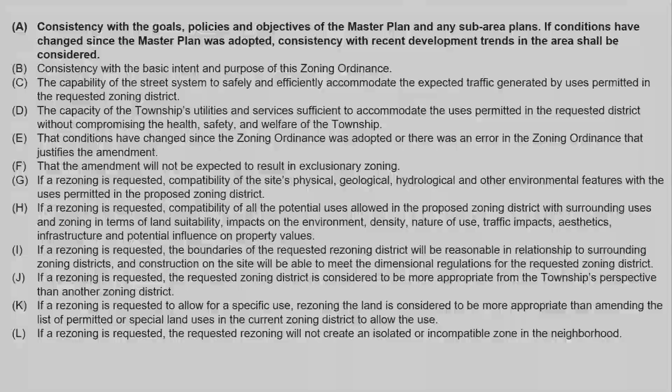The township's master plan was comprehensively updated in 2020, and there was a sub-area plan update for the Sumter Road corridor in 2022. Consistently, the area that is the subject of this rezoning request has been identified as a site for rural settlement future land use, which is correlated to the ag zoning being requested under this petition. So this criterion has been met broadly, that there is consistency with the master plan.

As a reminder, all master plans have a zoning plan as required by the Michigan Planning Enabling Act, which correlate planned land use to zoning. Having consistency with the master plan is one of the most critical criteria for considering a rezoning request.

The second criterion is that the proposed rezoning is consistent with the basic intent and purpose of the zoning ordinance. Section 1.102 of the Van Buren Township zoning ordinance includes regulations and restrictions governing the location and construction of structures and buildings to be used for business, industry, residence, social purposes, and other specified purposes. Based on that intent, the zoning ordinance includes provisions for zoning districts, setbacks, building height, and land use.

The specific set of regulations that would apply to this property if it is zoned agricultural and estates is section 3.109 of the zoning ordinance, which includes a mix of land uses made compatible with their surroundings by adhering to specific building architectures, setbacks, and design features.

In your packet, there's a printout of section 3.109 of the zoning ordinance that contains all the permitted uses and special land uses that are permitted subject to special land use approval in the ag district, for your reference. There's also a listing of the setbacks that would apply to those uses.

To speak briefly to the uses, the narrative letter has an array again of farming, both for personal and commercial farming uses. To be clear, there will have to be some understandings with limits on some of those farming activities. Things like milling lumber would be more of an industrial or manufacturing use that would not be permitted at the site, so we'll have to draw those distinctions and be clear about them.

But there are a lot of different arboriculture or lumber uses that are permitted under commercial agriculture that could be the result of this rezoning. And I will say that many agricultural practices are subject to state of Michigan policies and laws around best practices for agricultural management.

The capability of the street system and the capacity of the township's utilities and services are also considered in any rezoning petition. So I'll lump those together, though they are two different criteria.

The capability of the street system to safely and efficiently accommodate the expected traffic generated by the uses permitted in the zoning district, and the capacity of the township's utilities and services being sufficient to accommodate the uses in the zoning district, without compromising the health, safety, and welfare of the township.

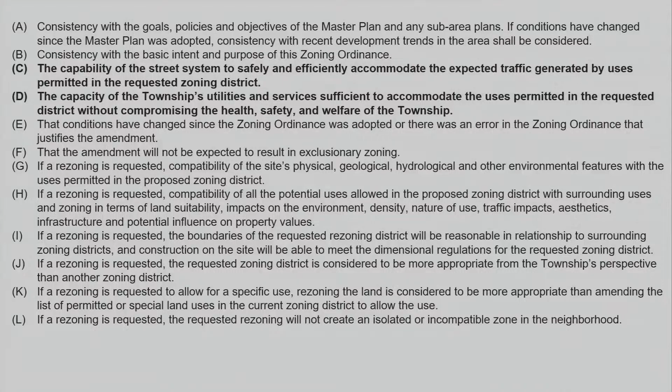On the street system, the proposed rezoning is situated on a site that's on Haggerty Road, and is not anticipated to add significant traffic generation to that stretch of Haggerty Road. As far as public water and sewer, the site does have public water, and is also large enough to contain a septic sanitary waste disposal system. I mention that because the township's sanitary utility district boundary stops north of that site.

The next criterion is whether conditions have changed since the zoning ordinance was adopted, or there was an error in the zoning ordinance that justifies the amendment.

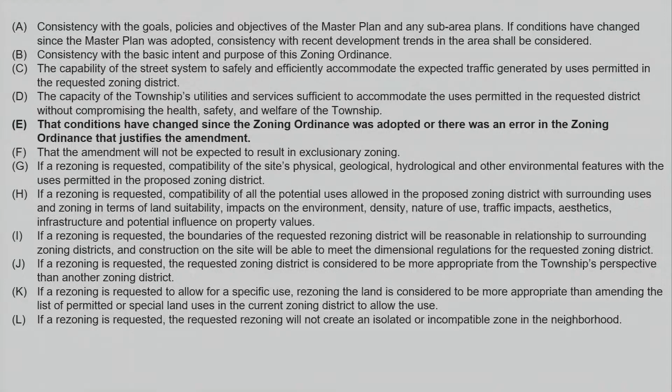The requested rezoning does not change the zoning ordinance, but rather brings the township further into compliance with the adopted master plan. There was no zoning error in the zoning ordinance, but conditions have not necessarily changed to the extent that an error needs to be corrected.

The next criterion we look at is whether the amendment will result in exclusionary zoning, which is a prohibition of a land use when there's a demonstrated need for the use. This request will not do that.

Whether the request is compatible with the site's physical, geological, hydrological, or other environmental features with the uses permitted in the proposed zoning district. I will point out this is a relatively large acreage lot where rural settlement or a lower density development pattern is suitable when you consider that there are some environmental constraints in the area or environmental features. There's a metro park to the east, the Griggs Drain, and some woodlands near the site.

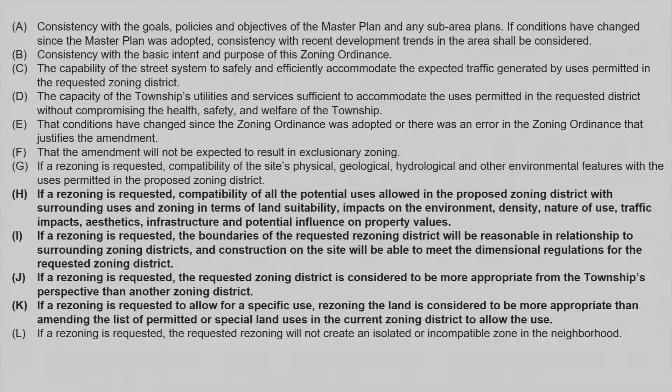I'll speak to the remaining criteria together: whether, if the rezoning is requested, the compatibility of all the potential uses allowed in the zoning district with the surrounding areas, surrounding uses and zoning in terms of land suitability, impacts on the environment, density, nature of use, traffic impacts, aesthetics, infrastructure, and potential influence on property values. Again, the owner intends to continue and expand upon the personal and commercial agricultural uses on the property and its use as a single-family residence.

These uses are consistent with the permitted uses of nearby properties, which are also zoned ag on the west side of Haggerty Road, and with the master plan calling for that type of zoning in the future.

If the rezoning is requested, the boundaries of the requested rezoning shall be reasonable in relationship to the surrounding zoning districts, and construction on the site will be able to meet the dimensional regulations for the requested zoning district. This is a site with over 500 feet of frontage, and it's 10 acres in area, so it will be adequate to construct buildings on the site that meet the required setbacks and adhere to generally accepted agricultural management practices.

If a rezoning is requested, the rezoning district being considered must be more appropriate from the township's perspective than another zoning district. Based on consistency with the master plan and the relative downzoning, this is found to be the case.

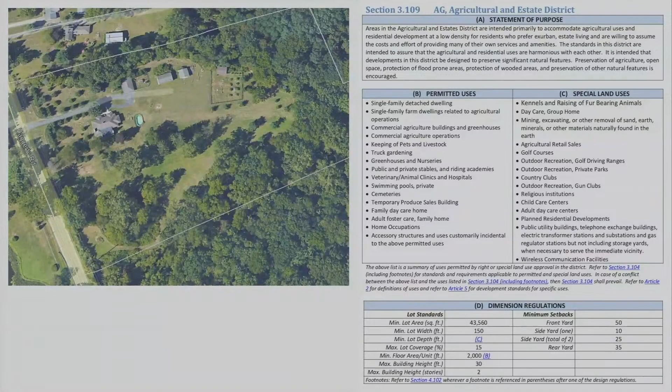If a rezoning is requested to allow for a specific use, rezoning the land is considered to be more appropriate than amending the list of permitted or special land uses in the current zoning district to allow the use. Given some of the use descriptions from the applicant, this is found to be the case. It would not be appropriate to bring commercial agricultural buildings, nurseries, greenhouses, things of that nature into the R1B zoning district. So that criterion has been met.

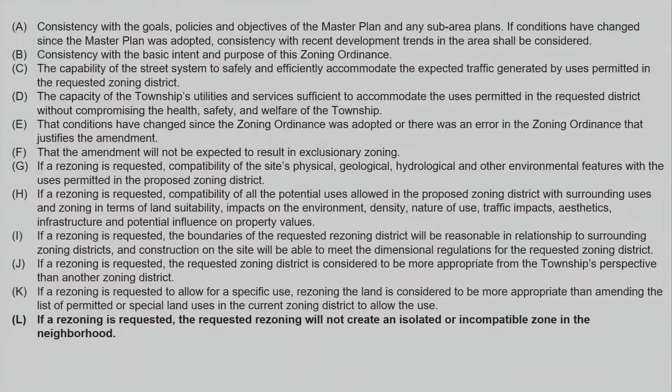Finally, if the rezoning is requested, the requested rezoning will not create an isolated or incompatible zone in the neighborhood. Again, there are agriculturally zoned sites across Haggerty Road to the west, and there is some analysis in this packet showing it is not going to be isolated in terms of the stretch of Haggerty Road on the east side.

As part of the analysis for this report, we wanted to take a look at what the feasibility would be of some of the other properties in this stretch being rezoned to ag. Some of the parcels along this stretch of Haggerty Road within, I don't know if it was 500 or 1,000 feet of this site, but a small distance from this site, there's a list of those properties that are nearby.

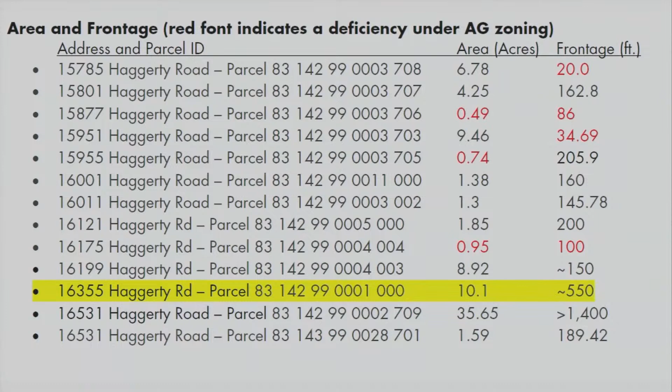A few of them have some dimensional issues that would restrict the ability to rezone to ag and use the properties for ag, but most of these properties would be able to be rezoned, and that lends to the idea that there would not necessarily be an isolated or incompatible zone, and this could be a rezoning that could occur elsewhere in this stretch.

Based on the findings I've just mentioned, findings 12.504A through L of the Van Buren Township zoning ordinance rezoning criteria, I would recommend that the Planning Commission recommend approval of the rezoning to the Board of Trustees. There are likely to be questions for the applicant or for myself, and I invite those questions. We have the applicant, Cameron Smythe, here in the audience, and he has not yet had a chance to speak about his request, so he's here if you'd like to invite him up to speak to it.

Okay, thank you, Director Power. And for the applicant, do you have anything to present to us? He's got to come up. Please identify yourself and your address.

My name is Cameron Smythe. My address is 16355 Haggerty Road. I would like to open up the floor to any questions. Dan, I think you did a great job of going through the case, thank you very much for that.

Okay, commissioners, do we have any questions for the applicant? Through the chair, I would like to know what are your future plans? I read your letter, but specifically, what are your future plans? And then I'd like to know more about your desires for lumber, growing trees.

Mr. Chair, I'd also ask, does the applicant realize that on an agriculturally zoned parcel, agricultural retail sales is a special use? You have to get permission to do that. Do you understand that? We're not in any grocery stores or licensed venues now, it's a network of family and friends that we sell to. A nice side note is that we use only organic amendments and fertilizers, we don't use any synthetics. As you can see, we have runoff into Griggs Drain here, so since we don't use synthetics, I don't think there'd be any adverse effects or negative externalities onto the environment. We do plan on retailing, but that's more next steps in planning.

Mr. Chair, I have a question regarding Griggs Drain, possibly for our engineering consultant. Sorry, I know you don't like engineering surprises, but I have a question regarding conversion of a property into agricultural use. This does have runoff into Griggs Drain. Are there any special engineering or drainage requirements that have to be taken into consideration when a potentially commercial farming operation is brought up alongside a drain that's right next to the Huron River?

Surface water quality is controlled by EGLE, the state, they would look into that and make any determinations needed. As far as traditional stormwater management and runoff, if you were developing a new site, that's where you would have to go through the county regulations. Like we're normally seeing, I don't believe they're developing anything at this point, so from what I can see just looking at it right now, I don't believe there'd be any issues with that.

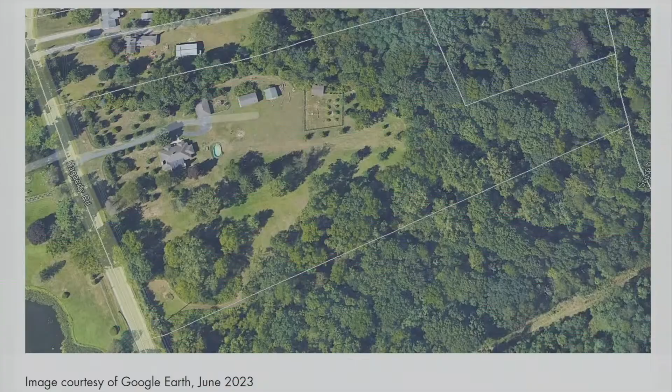So the first question — we decided to start the rezoning process because we're increasingly doing more agricultural activities on the property. We plan to start where there's that clearing, where we're going to put the apple orchard, and in the future we may open it up to the public for a you-pick apple orchard kind of situation. We're also expanding our vegetable garden to over 1 acre, and it's far too much produce for us to consume. These are passion projects we really enjoy doing on the property, and they are of agricultural background. So as we're moving in that direction, it made sense for our property to more accurately reflect the agricultural activities we are doing on it.

So now my follow-up question is, as our consultant from McKenna has stated, you cannot go back to residential. My concern is about the property value. Are you aware of what the property value is as residential versus changing it over to ag? I just want to know if you're aware of the difference. Sure, I haven't seen a side-by-side comparison, but we don't plan on selling anytime soon, so it's something I haven't really given much thought to.

Okay, I have another question please. This I guess is for staff or the consultant. Can you tell me, at the state of what he's doing right now, does the applicant really need to rezone? Or could he stay doing what he's doing, and then when he decides to expand, come before the planning commission?

Can we have the presentation by the township staff please? Director Power? Thank you, Mr. Chair. The Planning Commission is familiar with this case. They held a public hearing for the preliminary site plan review in November of '22, and then action was taken on the preliminary site plan and the special land use approval for the project in December. The Board of Trustees then approved the special land use in January of this year. So now the project has been going through engineering review and final site plan review by our consultants and staff for the past several months.

That is the purpose of tonight's discussion and potential action: to consider approval of the final site plan. I have a couple of comments to respond to items the Board of Trustees mentioned regarding their approvals of some engineering items. Otherwise, I'll defer to our planning consultant, Vidya Krishnan, to go over her findings, and then our township engineer.

As was just summarized, the proposal before you tonight is for final site plan approval for Brookwood, a senior housing development on a 44.23 acre site. It will have 132 independent living units in groupings of 2, 4, and 6 units, and also a clubhouse facility. The applicant received preliminary approval from the Planning Commission on December 14th, subject to a series of conditions. For final site plan approval, we basically review compliance to those conditions.

I'll summarize those in brief. The first condition was notation of a detailed phasing timeline and clarification regarding self-sufficiency of each phase. Originally the applicant had mentioned developing it in 4 phases, but when they appeared before you in December, they clarified the intention is to build it in 3 phases, with a detailed schedule for public and infrastructure improvements included. Based on that, each individual phase will stand alone and be self-sufficient, so should a future phase not materialize, the dwellings already constructed will still function as a self-sufficient development.

The plan notes that the roads and infrastructure will be built at one time, with a total construction timeline of 18 months, and 8 to 12 units being built per month to be leased as they come online. Given the provision of roads and infrastructure being built first, we believe this condition has been met. The second condition was Planning Commission approval of additional parking to satisfy visitor parking needs.

On paper, the applicant's parking calculations noted 114 extra parking spaces, but technically it's not 114 because they counted spaces within the garages and driveways. The actual number of extra spaces being constructed is 20, spread throughout the development so visitors can park and walk. The Planning Commission had recommended additional handicap accessible spaces among those 20-odd spaces so visitors have the ability to move in a wheelchair, and that has been done on the revised plan.

The third condition was addition of a deciduous or evergreen tree along Tyler Road in order to meet ordinance requirements, which has been done. The fourth condition was township engineer and Wayne County approvals.

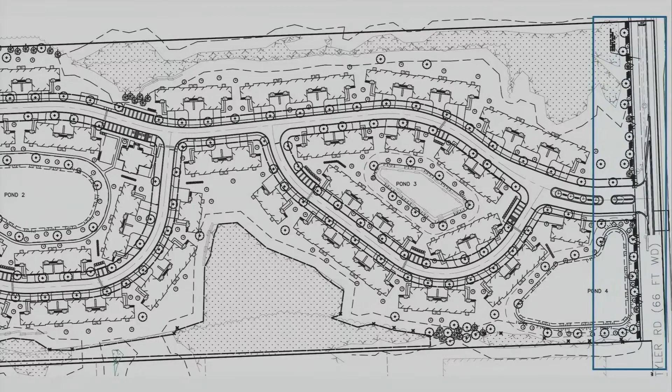I think that was the biggest reason for the applicant taking 6 months to come back before you. They have consistently been working with Wayne County to resolve grading issues and stormwater detention issues on the site. At the time this review letter was done, there was a letter from Wayne County still mentioning some unresolved issues, but noting these are issues that can be worked on. I believe additional documentation from Wayne County was turned in sometime this morning. I have not had a chance to review it, so I'll defer to the township's engineer and Director Power to clarify at what stage it is.

However, I do not believe the engineering issues that remain to be addressed will have any bearing on final site plan approval. Those conditions will have to be met before they start construction, so it's not a reason to not proceed with final site plan approval.

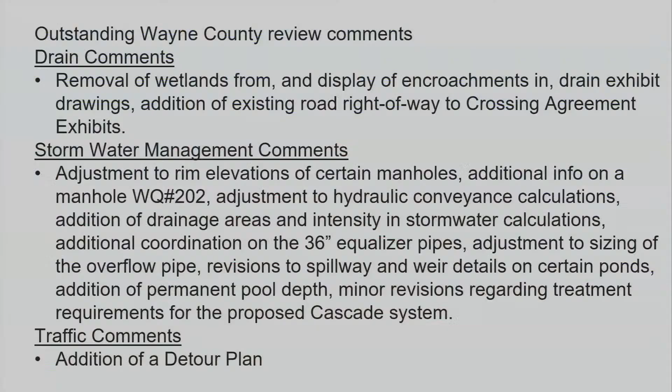Board of Trustees special land use approval was granted by the board on January 17th of 2023. There was a requirement that a dumpster enclosure be added for the clubhouse. At the time the project came before you, there was no dumpster enclosure, and the Planning Commission decided that for a clubhouse servicing all of these units, you do need an enclosure.

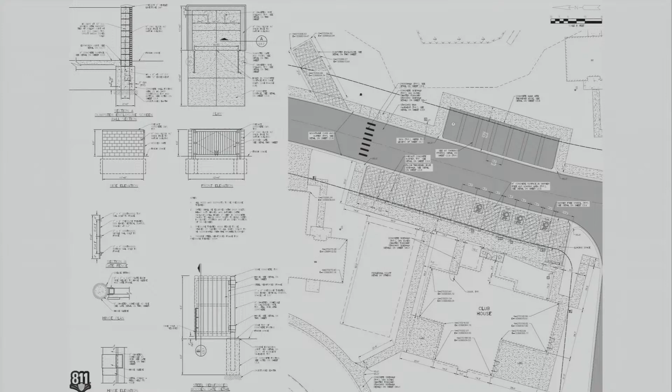So the revised plan does note a small access drive off the main access drive where the dumpster will be located so trash trucks can navigate in and out of the space. Typical enclosure details have been noted, and they will be block with face brick to match the clubhouse building and will have steel reinforced wooden gates.

And finally, there was some discussion about the maneuverability between the units when you have garages facing each other, courtyard type of entries.

So the applicant has provided, Director Power has pulled it up over there, has shown the turn diagram. The applicant has shown an F-150 pickup truck actually trying to make the move in and out of the driveway. As is typical in this, they will have to reverse back onto the driveway. The garages are not big enough to accommodate a pickup truck.

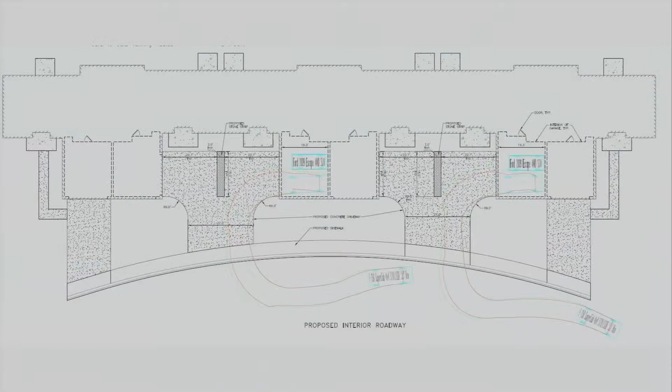So anyone in this development who actually has a pickup truck, which is one of the longer vehicles, will be parking in the driveway. However, the garage is more than sufficient to accommodate any of the regular passenger vehicles or sedans. At this time, all of the conditions of preliminary approval have been addressed, with the exception of engineering approval, which the township engineer will address.

So it is our recommendation that the Planning Commission grant final site plan approval for Brookwood Senior Housing Development to be located on Tyler Road, subject to full engineering approval from Wayne County and the township engineer. This recommendation is made with the understanding that should for any reason, at the time they're getting final engineering approval from Wayne County, any aspect of the site layout change significantly, such as the units moving around, the access drives, or any of the improvements moving around, the applicant will have to come back before you for amended approval. I'm happy to answer any questions.

The plan should indicate the finished grade of all fire hydrants, valve, well rims, and all other water structures. Profile views are currently not indicating finished grade for hydrants. Fire hydrants are also not labeled on sheet C 5.14 and on C 5.15. All hydrants shall be labeled on the water main sheets.

Per discussions between the applicant and the township, a water main extension to the east property line was added between units 30 and 31. The original intent of the township engineer's request was to place the water main extension just north of Basin 5, between Basin 5 and the wetlands. Also, per township standards, the applicant must add a gate valve and well at the termination of the water main stub at the property line. It should also have a profile for the design, and an easement is required.

We're currently working through this with the applicant. We requested this during one of the last engineering reviews, so that is still being coordinated between the township and the applicant.

The applicant should verify the need for a tapping sleeve. Currently, all the water main tee labels on the plans call out a 12 by 8-inch tapping sleeve. Lastly, for water main, per Chapter 3, Part 4, Section D of the Township Engineering Standards Manual, water services shall not be installed under driveways or other obstacles. Currently, the water shutoff for Unit 119 is under the driveway.

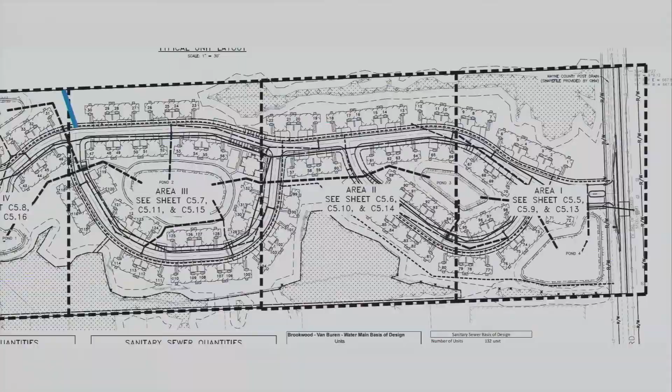Sanitary sewer: the township's GIS records indicate a 15-inch public reinforced concrete pipe sanitary sewer main running east-west along the south side of Tyler Road, with two sanitary manholes, one at the east property line and one at the west property line. The sanitary main flows west towards Morton Taylor Road. Township GIS records also indicate a 10-inch sanitary stub at the very northeast corner of the site.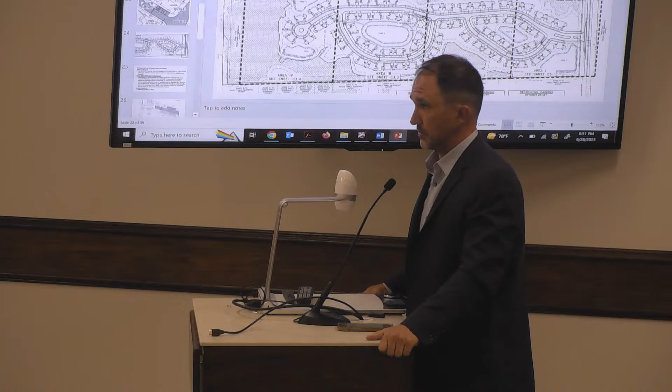Thank you, Mr. Chairman and members of the Planning Commission and Mr. Power. My name is Luke Bonner, Bonner Advisory Group, 1054 South Main, Ann Arbor, Michigan. We're consultants to the project. I want to introduce the team - the entire team is here this evening, starting with Golan Sapir, here from Israel, the primary owner investor in the project. We have Melody Stevens, Ido Furman, who did a nine-hour drive from New York to be here this evening, Chris Garner, owner, our consulting engineers from Wade Trim, Eric Smith and Veronica Clark, and our other real estate consultant, Tom Gritter from Gritter Real Estate Services, and Gordon Dion.

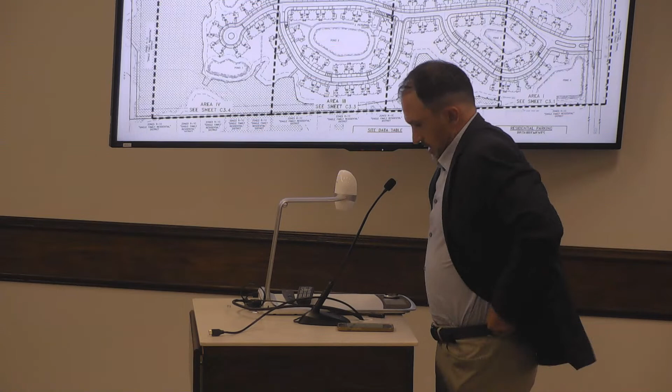We do appreciate all of the support for this project going through the process over the last 24 months. The staff has been excellent to work with and very consultative and helpful. The point we're at this evening is a request for final site plan approval contingent upon the engineering conditions being met. Over the last several months, engagement with Wayne County, OHM as their engineering consultant, and the township's engineering consultant has been pretty regular and continuous. We feel the outstanding engineering items are more detailed and administrative, and there weren't any engineering issues that were going to massively change or alter the site plan at all. Hence the reason for us being here this evening. All of those issues have been addressed in a response letter from Wade Trim to the county and to Fishbeck, so we feel comfortable managing those final details on the engineering drawings and getting those submitted for final site plan approval.

As it pertains to mosquito management that was brought up, we believe that's in general an overall property management issue that we plan to take on. Because if you walk the site on the north end where the conservation easement is, it's pretty heavy mosquito territory up there, so there's definitely going to be a plan for residents in general to manage that.

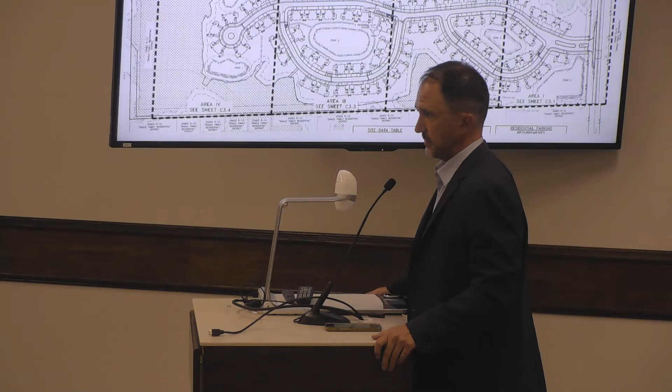When it comes to the ponds, we certainly plan to manage it more from an infestation-related standpoint versus potentially aeration, only because the ponds are shallow and they'll dry out quickly. I'm not sure if aeration is the best method versus consistently spraying, but we will discuss that with the township as well.

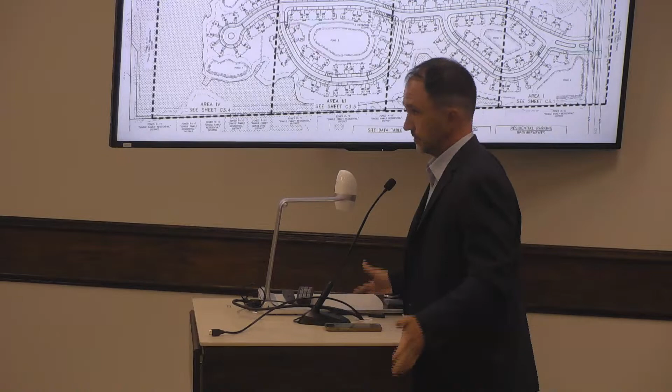And related to fencing, we do agree, if there's a safety issue on the fence on the pond along Tyler Road, we can meet that with a decorative 4-foot-high aluminum fence that has the wrought iron look to it. Again, we're appreciative to be here this evening, and we appreciate all the support. We have other members of our team here that could answer questions if you have them.

Commissioners, questions?

Mr. Chair, Commissioner Jarrett, question for Fishbeck Engineering. What kind of standards are there around mosquito abatement in a drainage pond like these, in these sort of ponds?

I'm not entirely sure, to be honest. Engineering standards don't typically deal with mosquito repellent. From the Township Engineering Standard Manual, the stormwater detention pond section just states 4-foot permanent pool water, 1 on 6 side slopes - no aeration or anything like that is mentioned in the engineering manual. So at this moment, that's as far as I can answer that question. I can certainly follow up on that and see if I can find anything else.

Director Power, the mosquito aeration that you suggested, did you have any standards for what should be done? The zoning ordinance is pretty broad, and that's my understanding as well. There's nothing that I've seen in our engineering standards that speak to the aeration. It's just a comment in our stormwater pond section of our zoning ordinance that asks for consideration of aerating - mechanical aeration, or selective plantings. I'm not entirely sure what that planting mix would be, but generally the more you're maintaining a wetland aesthetic and holding a permanent pool of water at a shallow depth, you're going to have mosquito concerns as opposed to moving water. So the planting selection may just be more of a uniform planting than a mix of wetland species, but I'm not sure - Ms. Krishnan, do you have some ideas?

Just an insight - at least historically, we used to require aerators in ponds until Wayne County said no. A few years ago, Wayne County decided they did not want to see aerators in their ponds. We do planning for a lot of Wayne County municipalities, and we've seen across the board that aerators are no longer permitted in the ponds. It's still there in our zoning ordinance, but the county may not allow it. So I think the best way to manage it is through selecting what kind of plants go in around the basin so they don't harbor mosquito breeding grounds, and also spraying them as part of the regular maintenance. If the Planning Commission should choose to consider aerators as an option, definitely add it only if the county permits it, because ultimately the pond is under Wayne County's approval, and to my knowledge, they don't allow aerators anymore.

Is there a reason to assume that these drainage ponds would have more mosquitoes than the wetland it's being converted from? No. Sorry, it just felt like I had to ask that.

Okay, yeah, several minor detail comments on the engineering letter. Okay, and it did sound like the applicant is aware of all of the items on the engineering list and is not contesting any of them at this time. I suppose, Mr. Chairman, that's a question for the applicant to answer. Yes, please, ask the applicant.

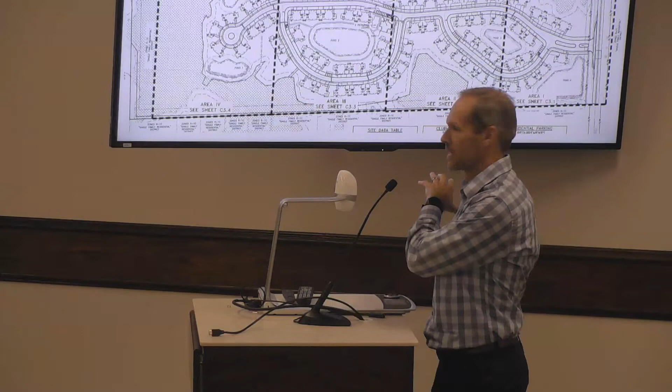I wanted to go back to the comment about plantings or aeration in the ponds. Our experience has been that aeration isn't something we've done in a while. We have landscape architects on staff, and I asked them about what plantings there could be, but there really isn't anything. The best way to handle mosquito control is a spraying plan, which is what the applicant's going to do.

In terms of the response letters, yes, I agree. A lot of those are detailed final construction document type comments that I agree we can pick up, and it doesn't change the design intent that you see here for final site plan approval.

You don't have any argumentative position against what our engineers are proposing, is that correct? That is correct, yes.

Just a correction - the last round of comments we received from you, we haven't responded back to those yet. We just responded to the county ones here in the last couple days. Our letter was sent out last Wednesday. So it's in process.

I have a question. You mentioned to control the mosquitoes you have a spraying plan - how might that spraying plan potentially affect the wetlands and wildlife in the area? We would stay in the developed area. What material would you plan on using, is it toxic in any way? No, there's something my landscape architect recommended that would be good, natural, but I don't have the specifics. So you'll make it clear that you can't use anything detrimental to the wetlands and local wildlife? Correct, we can put that in the maintenance plan.

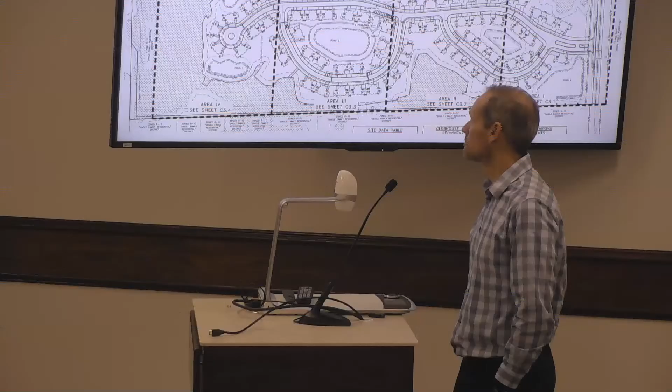I have another question, though I think this may be a Fishbeck question. You mentioned in your write-up that there are still concerns with the constructability and installation of the force main relative to the existing utilities in Tyler Road. Assuming that's related to getting the pump underneath the road - when you say that, are you saying during construction it may be difficult and there may be problems, or that at this point they haven't totally engineered that system to get over there and make it work?

A little of both. Constructability-wise, it appears to be very difficult. The GLWA 42-inch water mains there are, I believe, 13 or 14 feet deep. So when you open cut and start excavating Tyler Road to place a force main that has to be 1.5 feet lower than the 42-inch water mains, you're getting to depths of 17, 18 feet.

Right now - and I'm not saying it can't be done - but the plans had a detail for the open cut that just showed a typical trench detail with one-on-one slopes going up. I think OHM, the county, had a comment recently noting it would probably be difficult to maintain one lane of traffic doing that. They need to provide a detour plan, which they don't have yet. So there are several details I believe they need to work through still.

That's a very deep excavation and very sensitive water main, transmission mains. I think the report said they were AC pipe, but we just recently found out they're pre-stressed concrete pipe - large concrete with reinforcing steel that's been pre-tensioned. Those are fairly delicate, from what I've been hearing, and we want to make sure it's very detailed on how this gets constructed.

We also had a comment about going over those 42-inch water mains. There's just a 10-inch - I shouldn't say just a - there's a county drain there that appears to travel under the entrance drive in a 10-inch culvert. We want to make sure the applicant looks at whether that 10-inch culvert could be raised, or the water main lowered, et cetera. We want all those details very clearly designed on the plans.

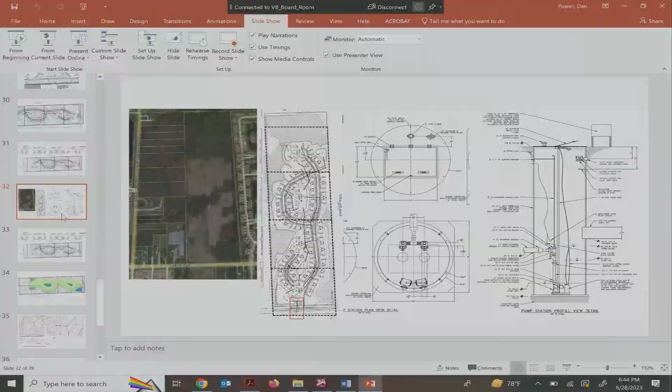MOT, detour plan, area of construction influence - all of those items should be detailed out. Because if you excavate a trench like that down to 18 feet deep, it needs to be so wide you're getting an 18 to 20 foot wide hole, and you need to support 3.5 foot large water mains while you're doing all that work. That's the concern - we want to make sure GLWA is aware, and I believe we've had that comment before too.

Okay, so you're confident they can achieve it, they just have to work through the details, is what it sounds like?

Yeah, it should be addressed and acknowledged on the plans. I believe OHM has commented on this, they initially approved the open cut, but they recently asked for MOT as well. So as long as the construction details on the plans are shown a little more clearly.

Through the chair, okay, I'll make a couple of comments. The design of the actual pump station apparatus, to my understanding, is unlikely to change. The method of having to divert the wastewater that way is probably the only feasible route from what we've reviewed. So a lot of the construction issues coming at this point are relative to how the pipes cross Tyler Road, to my understanding, and that's the detail that has to come forward. But that's not likely to change the location or the overall method of having to use a pump station at that site.

Is that fair? I forgot, you had mentioned the pump station system itself, we recommended approval of it. The pumps, so our concern mainly is on the 4-inch outlet that will cross Tyler. So even if that changes or it doesn't change, the pump system itself, that the Board of Trustees, or we recommended the board approve, that would not change.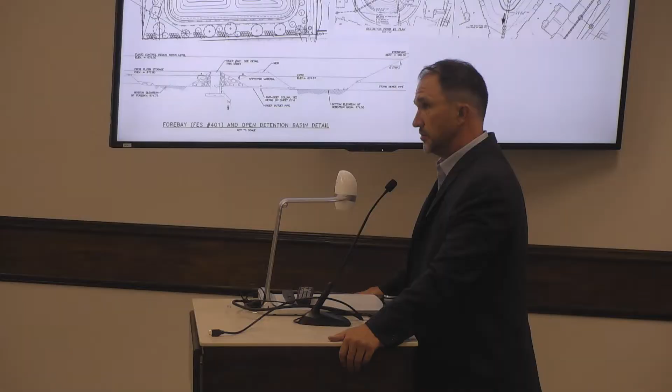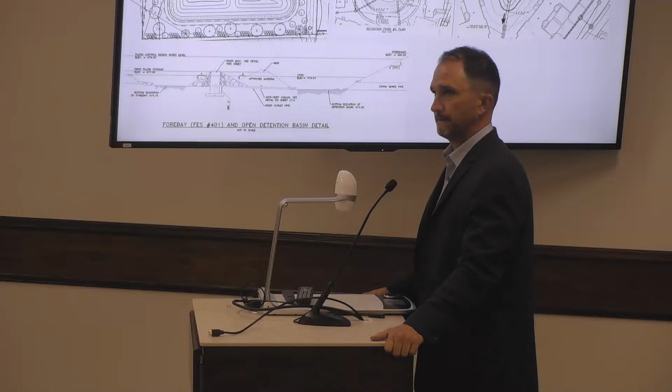The ponds are generally designed the same in terms of how they're holding water, per township ordinance. What about within, say, the first 5 feet of the water edge? So in terms of slope, the slopes are all designed to be the same slope. And the site's generally flat to begin with, so the ponds end up being a little bit flatter. The township ordinance requires a 4-foot standing water depth; we had a variance approval last week for 2 of the ponds, which are much flatter with only 1 foot of water being held. I can't read the grade lines, but roughly what's the drop between the grade lines?

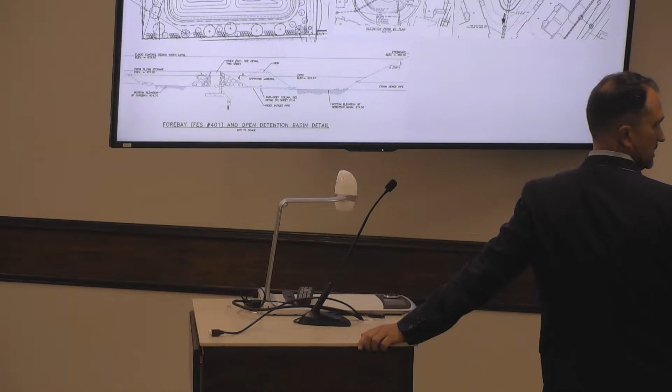I think they're 1 foot contours. What's the deepest point in the pond? It's 8 feet. Okay, 4 feet for the permanent water. Yeah, they are 1 foot then. It goes up so that it can hold stormwater.

Historically, the Planning Commission has not required fencing around detention ponds unless the pond is located in an area where it can be an attractive nuisance, such as pond number 4 that's right next to Tyler Road. It's attractive to kids who are just passing by, not necessarily those visiting their grandparents, so having a fence around pond 4 with Tyler Road frontage makes sense, so that kids passing by don't decide to go in there and do something.

But interior ponds we have typically not required fencing; that's been consistent with our standards. As Mike was mentioning, pond number 3 is designed with gabion baskets, correct? I'll defer to our landscape architect. Those aren't sloped lawn areas, correct? Would you mind describing those real quick? It's more of a tiered design, right? Yeah, if it's a gabion basket kind of design.

It's the southernmost interior one, all the way to the right in the colored graphic, the smaller one. That's pond 3. This is pond 4, and that would be pond 2. And pond 3 is gabion basketed because it's a smaller pond in a smaller area and therefore needs a steeper slope.

It acts like a terrace. Do they both have the same volume? Yes, that's why.

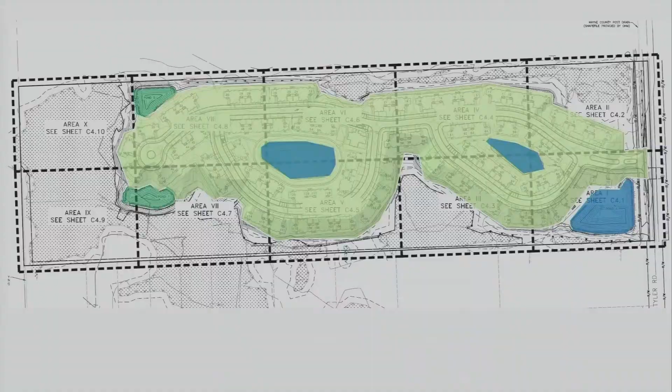Any other questions or discussion? Yeah, through the chair, Commissioner Bud. When we first looked at it, we saw that the F-150 fit in the garage, and that's the dimensions that were there. Now they're saying an F-150 or a larger SUV will not fit in the garage. How small are these garages?

I don't think they changed the size of the garage. Initially, when they showed the figures, it was a regular vehicle. The garages, I believe, are still 20 by... could you, Dan, pull up the site plan sheet? What's the size of the garages? But you're still saying a truck won't fit based on the floor plan layout. My garage didn't allow for my F-150 to go into it, and I don't know if anybody else's does. No, they've never changed it—they never allowed an F-150 to be parked in it, just because of the height, or a bigger SUV.

Most garages, in order for a larger SUV to be parked, at least based on standard dimensions, need to be minimum 22 by 22. Most homes have a standard garage size of 20 by 20, which would not fit a larger pickup truck. Unfortunately, the trucks are getting bigger. The garages mostly remain the same unless they're the larger lot homes with 3-car garages, but yes, the applicant has not changed the dimensions of the garage.

It's just that when they were showing the turning radius, it appeared in the initial diagram as though the vehicle shown was also going into the garage. I think they clarified this time that the vehicle they're showing is an F-150, but the garage will accommodate an Escape or an Edge or an SUV of that dimension. I'm not sure exactly what the size of the garage is, but if Director Dan could check, I don't know if the drawing shows it—I'm guessing it's somewhere around...

Yes, I apologize, sometimes technology doesn't keep up with the conversation, so bear with me. I'm going to try to find the exact floor plan for that. Here we go. The printed set is 149 sheets, so I consolidated the set for tonight's viewing. I do have the floor plan up now—I'll show this, just bear with me while I get it centered.

Through the chair, very belatedly, there's a display of the typical garage on the screen. So you can see the 16-foot clear area of the overhead doors and the 22-foot-2 depth, just for a point of reference. Depends on how big the cab is in the back - wouldn't be able to walk around it very easily.

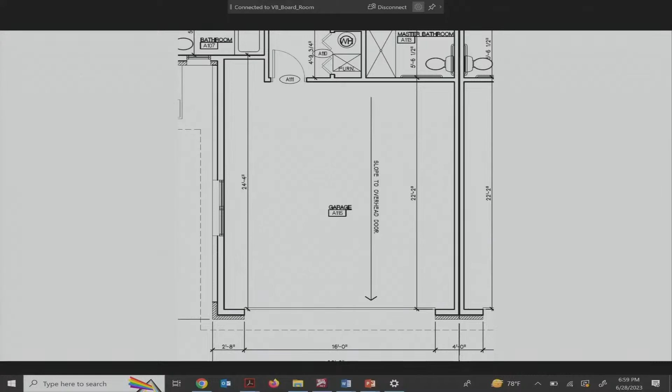Talking about ceilings. Okay, do we have any other comments from the commissioners? Yes, I tried. Seeing none, do we have any comments from the public? Anyone on Zoom, Director Power? See nobody on Zoom. In that case, do we have any motions from the commission?

Mr. Chair? Yes, Commissioner Jar. I move to grant the applicant, Chris Garner, on behalf of owner SB Invest LP, final site plan approval to construct an independent multifamily residential senior housing development with 132 dwelling units, along with a clubhouse and other site improvements, at the site located on the north side of Tyler Road between Morton Taylor and Haggerty Roads, with tax parcel ID 83-04-399-001-500, based on the analysis and subject to the conditions detailed in the letter from staff dated 21 June 2023, McKenna letter dated 21 June, Fishbeck letter dated 21 June, the VBT fire report dated 13 June, all of 2023, with the additional condition that a wetland-compatible mosquito abatement plan be included in the plans, and that decorative fencing for pond number 4 is required per the staff recommendation. Humbly submitted for your support.

We have a presentation by the township staff. Director Power: Mr. Chair, this is one of several times the Planning Commission has seen this, probably the same memo. I don't think much has changed since Ms. Krishnan first wrote it, but this image on the screen encapsulates the extent of this proposed ordinance change. Our zoning ordinance is inconsistent with some area comparison communities in being more restrictive—it has a 30-foot and 2-story height limit, compared with a more standard 35-foot, 2.5-story limit. This graphic shows the effect at the maximum extent. Height is measured from the front average grade elevation to the halfway point between the eave and peak of a roof on a typical gable roof structure. So this would be an example of a 2.5-story, 35-foot structure. Ms. Krishnan has a report, and if the Planning Commission would like to forward the recommendation to adopt this zoning ordinance text amendment set to the board, we'd turn it into an ordinance format and bring it to the Board of Trustees at an upcoming date.

Please feel free—you might want to mark what grade is. It doesn't show what it should denote; grade, where it begins, even though it's clear to us.

Sounds good. This is an amendment the Planning Commission has been discussing for many months now. You even had a public hearing last time, but because the agenda was so heavy, action on this was deferred. You have two memos in your packet—they're essentially the same thing, except the one we did in May showed the changes in isolation, and the Planning Commission wanted to see where exactly it fits in the zoning ordinance, so this one is slightly lengthier. It's the exact same text, and the recommendation to change it from 30 feet and 2 stories to 35 feet and 2.5 stories comes from research of all our neighboring municipalities, seeing how other communities handle this and what impact it has on the residential stock in our township. Essentially, by making this change, we are not creating more building mass or height—we're just allowing existing space to be utilized to create that half story, which right now, even if your building is that height, you can't use. This allows existing single-family residential footprints, even if smaller, to maximize living space within themselves, and is consistent with what almost every other municipality has in their zoning ordinance. I'm happy to answer any questions. I'll also make a correction to the drawing to show exactly where the grade is before it goes to the Board of Trustees, and put it in the proper ordinance format with a severance clause and all that.

Okay, do we have any discussion? I have a question—this is just for the homes, right? Yes. Because if somebody wanted to build a traditional barn on an ag piece of land, does this have any bearing on that? No, this is strictly for dwellings, homes only. That's what I thought, but I wanted to clarify before it went further, because we just had an ag man in there—he wants to build a full hay barn, and those things get pretty tall. Yeah.

Do we have any other comments besides mine? Mr. Chairman, I'd like to ask Commissioner Grant, as an architect, if you think it's okay. I think it's fine. Thank you, sir.

I would ask for public comment, but we don't have anybody out here. Is there anybody on Zoom? No, sir. Okay, do we have action by the Planning Commission?

Commissioner Jar: I move to recommend to the Township Board that they adopt the proposed amendments to the zoning ordinance text in sections 3.106, R1A, R2A, R1B, and R1C single-family residential districts, section 3.107, RM multiple dwelling residential district, section 3.109, AG agricultural and estate district, and section 4.102, schedule of regulations, to modify the maximum allowable height for detached single-family dwellings to be the lesser of 2.5 stories in height or 35 feet in height, as described in the McKenna letters dated May 1st, 2023, and June 7th, 2023.